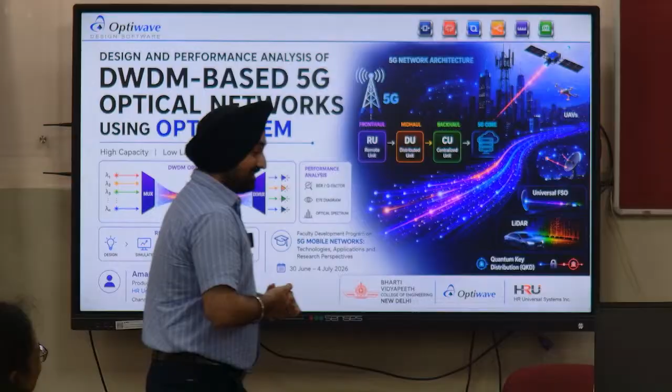So from the name optical, I would like to interact with you. What is optical communication? I always start with this question. Partially it is fine. What is optical communication? Yes, correct. As a layman, anything you want to transfer or communicate with the speed of light is optical communication. If you modulate the data and bind that as a carrier on a... exactly, basically when you transmit something and the carrier is laser, so that is optical until it is received.

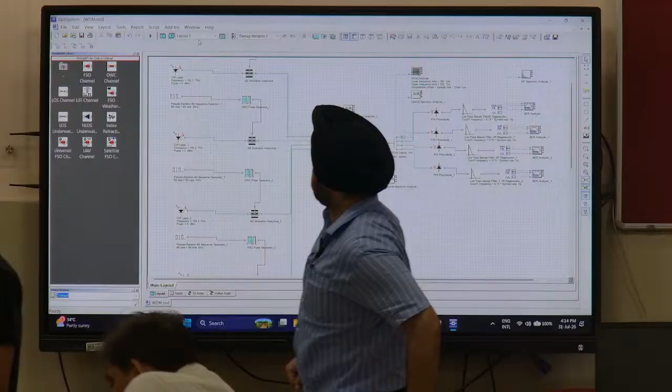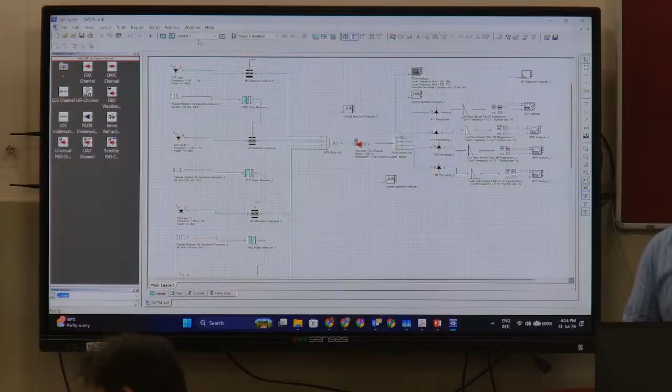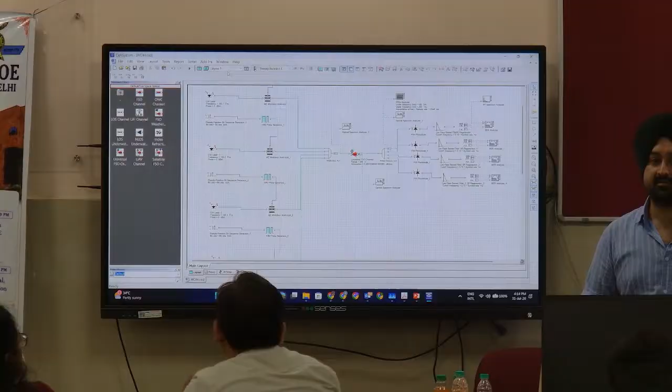Okay, so as per the topic, wavelength division multiplexing, or DWDM, whatever you want to call it enhanced. So I have performed a WDM application here with three scenarios: utilizing free space optics channel, utilizing optical fiber, also utilizing ground to UAV, UAV to UAV, and UAV to ground.

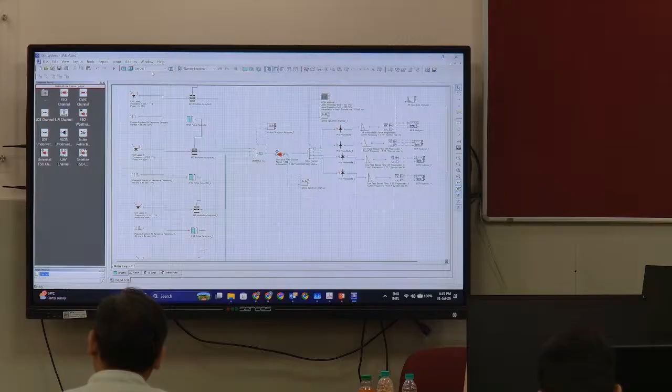Recently there are no such highlights regarding WDM application with respect to UAV methodology, but in case you are interested, you can explore this and you can publish as many papers as you want. Very simple, fundamental.

So here, let me explain you, for those who are new to this concept: we have taken four transmitters. These are optical transmitters 1, 2, 3, and 4, the four optical transmitters. Now, how have we compiled this? Let us see.

This is a carrier CW laser. You can either choose it as a frequency in terahertz, or you can choose it as a wavelength in nm, depends upon you, or even hertz also. So whatever units you want, you can use. If it is in nm, let us say 193.1 terahertz is equal to 1552.52 nm, that is approximate.

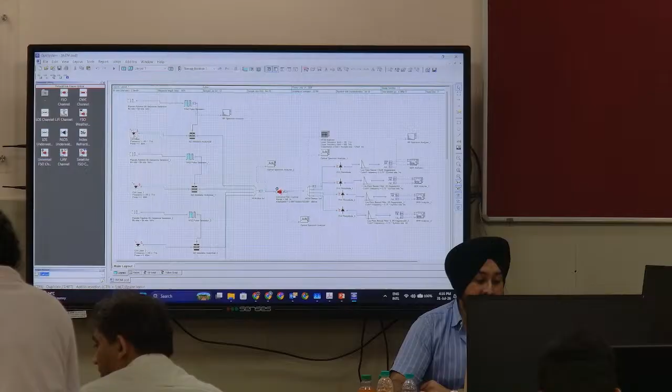So this is a carrier, this is a modulator, and this is the data we are binding, or you can say we are modulating it with the carrier. So this data is the pseudo random bit sequence generator, meaning it will randomly generate zeros and ones. Or in case you have your own bit pattern in the form of zeros and ones, you can choose a user defined bit sequence generator to define your own bit pattern.

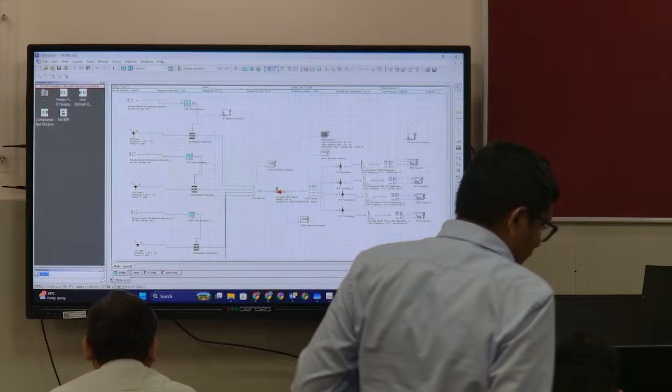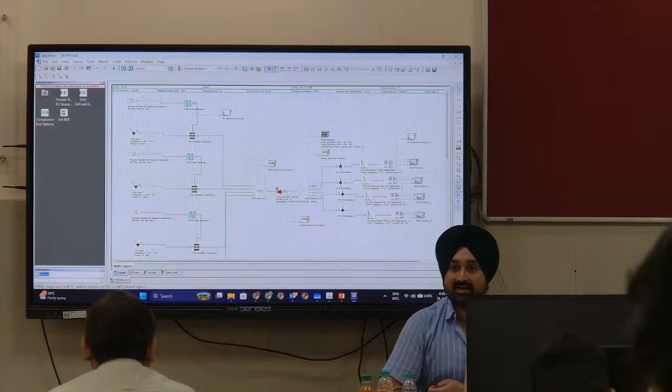So this is in the form of bits, that is zeros and ones, binary signal. You can assume that in case you have audio, video, images, whatever data you have, you can encrypt it in the form of zeros and ones, that is binary. Then the binary data is fed into an electrical generator, which gets the binary digits from this generator and converts it to an electrical signal. If you double click on the output port, you can see this is the electrical signal.

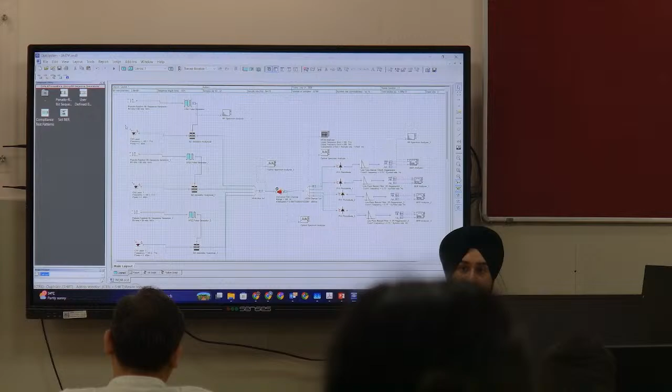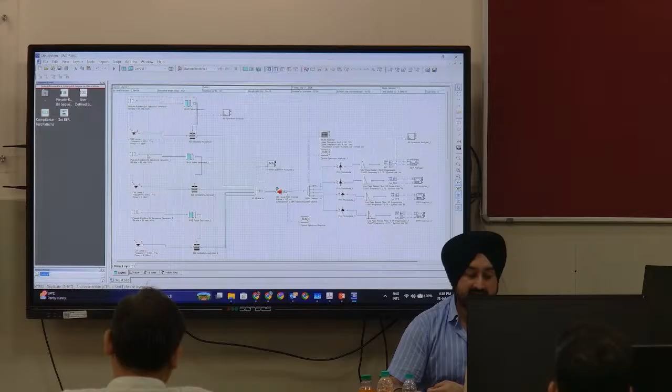This electrical signal is further fed into the Mach-Zehnder modulator. Here the Mach-Zehnder modulator takes input from this NRZ pulse generator in electrical form, and another input through the carrier, that is optical signal. So both arms are fed with the respective signals, and in turn we are ready with our final output at the Mach-Zehnder modulator, that is the optical signal. So in this way, these are the 4 transmitters, but here the variation is as per the principle of WDM, wavelength division multiplexing—it means we are varying the wavelength or frequency.

So at the first transmitter we are utilizing 193.1 terahertz. In the second one we are using 193.2, third 193.3, and fourth 193.4 terahertz.

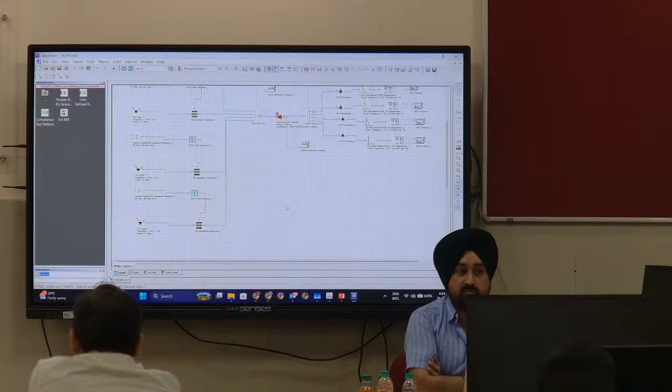So in respect to your application, you can design multiple channels: 2, 4, 8, 16, 32, 64, and so on. It depends upon the application you want. Accordingly, you can create the number of channels.

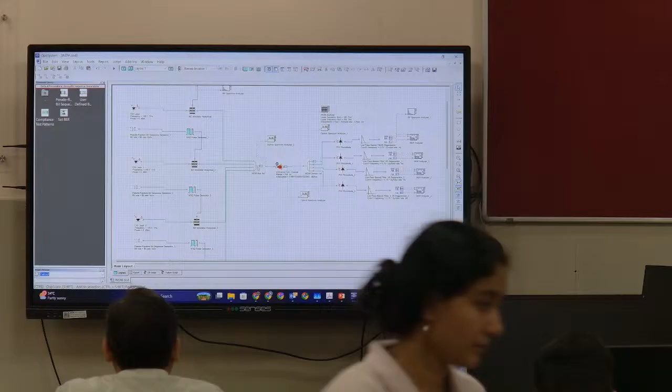So now, after getting the optical signal from all the transmitters with varied frequency or wavelength, we are muxing it using a WDM muxer. This is 4x1, and you need to mention the channel frequency with respect to the signal you are receiving. For the first one it is 193.1, and up to the fourth it is 193.4.

Then we are using a medium, that is the universal FSO channel. Here the universal FSO channel range I am using is 200 meters. You can optimize this, you can increase the range depending upon the actual result you are getting.

I am utilizing the FSO weather parameters for clear, haze, and fog environments. Depending upon the visibility, you can change this as per your application.

So here it is open-ended, a clear environment with 50 kilometers of visibility. And if you feel it is foggy, you can mention 50 meters, 100 meters, whatever scenario you want to create. And if you want rain or snow, you can choose precipitation.

For precipitation, you need to mention the precipitation rate depending upon the rain, cloud, or snow. And if it is clouds, you need to choose the type of cloud. We have a list of clouds here, and depending upon the height or altitude from the ground, you can choose the clouds for the environment.

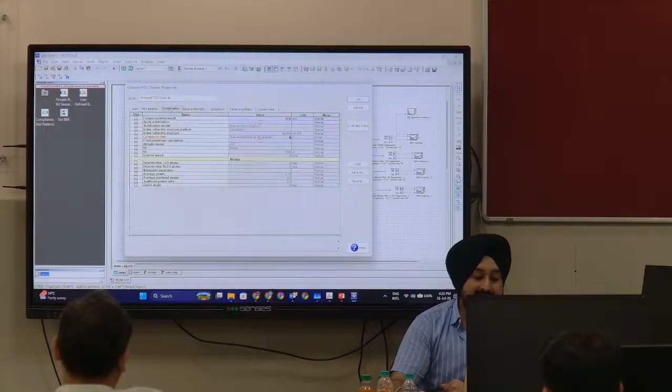Right now I am choosing a clear environment with a visibility of 50 kilometers and a radius of 1000 nm. I am not choosing any scintillation here because I am not rigorously doing research here. This is just for the sample.

So this is the universal FSO channel, and after passing it through this, we are again demultiplexing it using a WDM demuxer. This will help you split your frequencies into separate channels, and after splitting you are receiving it on a respective pin photodiode, avalanche photodiode, or any receiver you have.

And after receiving it on a pin photodiode, we will be filtering it using a low pass Bessel filter. At last we are doing analysis of the quality factor, your eye diagram height or eye opening, and we are also checking for OSNR and SNR, meaning signal to noise ratio and optical signal to noise ratio.

In optical communication or these kinds of applications, when you are analyzing something, a few factors or comparisons will help you enhance your publication. For example, BER, quality factor, amplitude histogram, OSNR, SNR, and power factors, meaning what you are feeding as input, and at the end what power you are getting at the output.

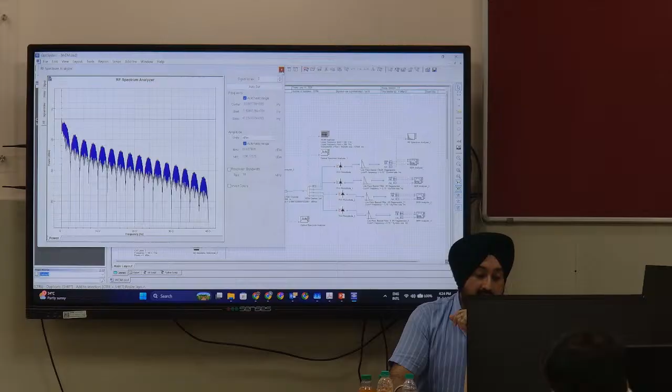This is basically generated by your NRZ generator after getting the random bits. The bits can be anything; you can feed your own bits. For example, if you are working with another simulator and your output is in the form of bits, you can choose those bits and feed them here. That can also be utilized in this case.

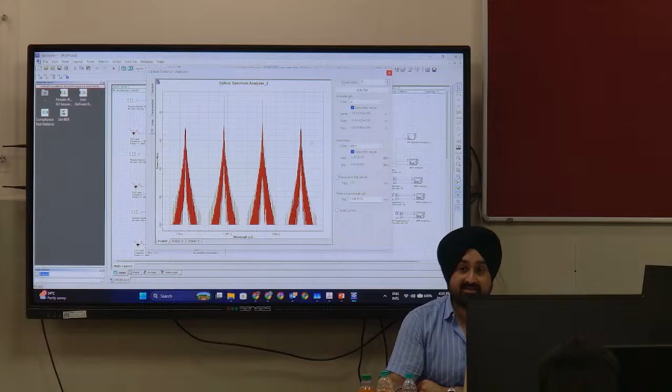And the spectrum analyzer, when you bind everything, when you mux everything, at the optical spectrum analyzer you are getting 4 various wavelengths or frequencies, you can say. So this is the output of the optical spectrum analyzer. In case you have the same in your lab, you can do some R&D and see how the visual effects appear with your OSA.

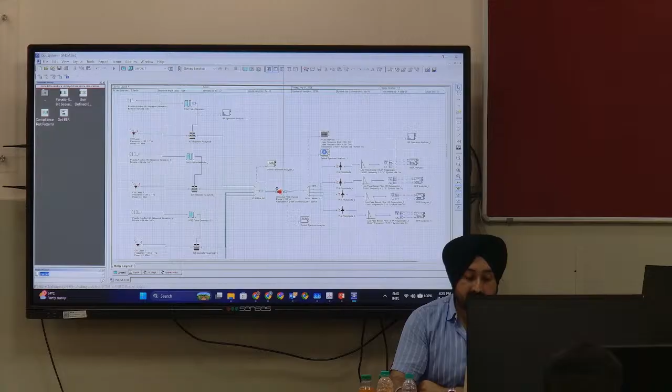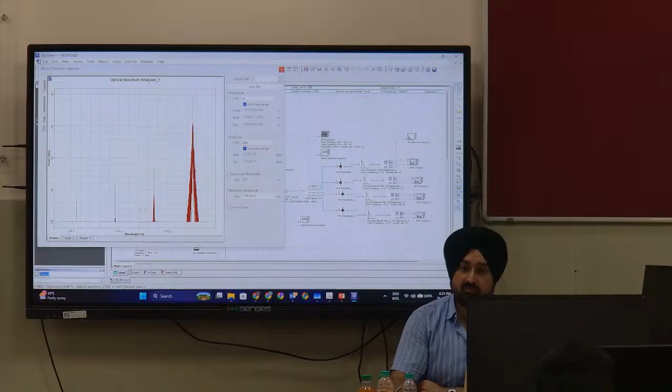And at a single channel, I am looking at another spectrum. So this is the main channel frequency we are getting here. Also, we are getting some harmonics, leftover harmonics, in relation to other channels.

So if I look into the analysis, here I have 73 Q factor, minimum bit error rate 0, eye height threshold decision. We have these results at one channel, similarly for another channel, then third channel, and fourth channel.

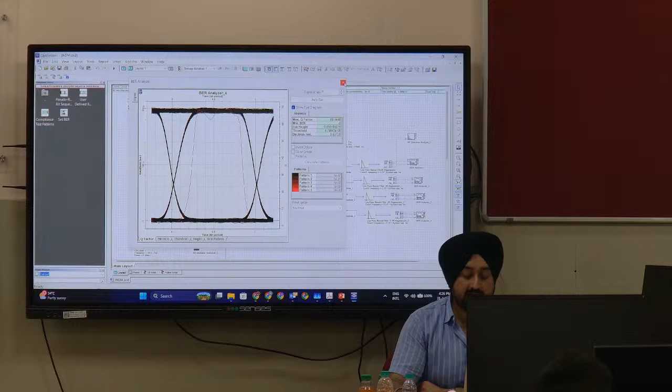So we have successfully compiled a WDM based concept using free space optics channel, where we are utilizing a 4 channel system, using 4 channels for our various applications, binding it together, transmitting it through a free space medium, receiving it at a ground, and again distributing it to our subscribers.

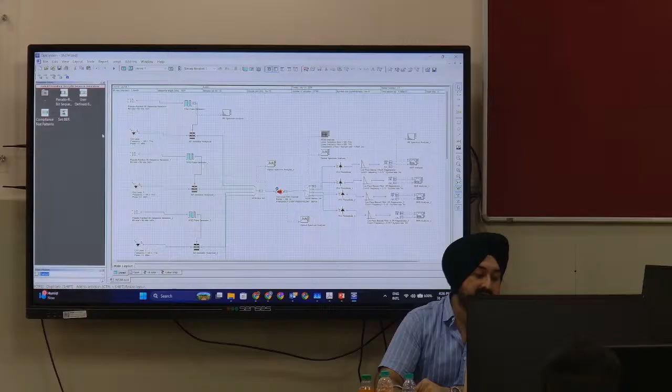Yes, I am using NRZ technique. Yes, we can change, we can choose RZ also, but as per actual research, RZ is better than NRZ. Exactly, right.

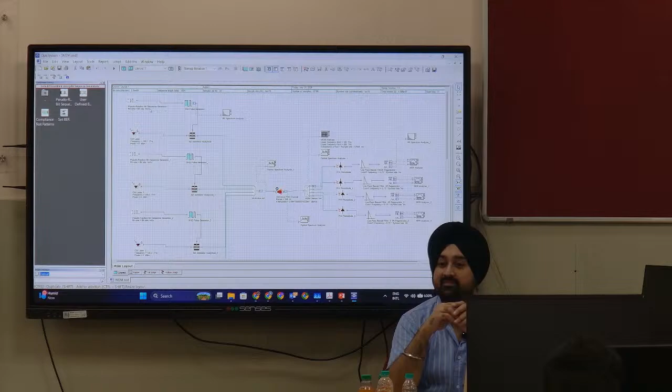So you can compare these methodologies. You can design using RZ, NRZ, and other application factors as well, and then at the last, you can compare. This can also be a research paper.

Okay, so this was utilizing FSO. What if I use optical fiber? Generic single mode fiber, SMF, and in India we are utilizing SMF28.

That is a patent of Corning Inc, USA. Corning Inc is a company in USA who manufactures optical fibers, and of course they are the main developers of Gorilla Glass. So the Gorilla Glass is in our screen of the phones or LEDs. That is basically patented, manufactured, or invented by Corning USA, and SMF28, which is being copied in India for fabricating optical fibers. Like they have taken the reference from SMF28 Corning.

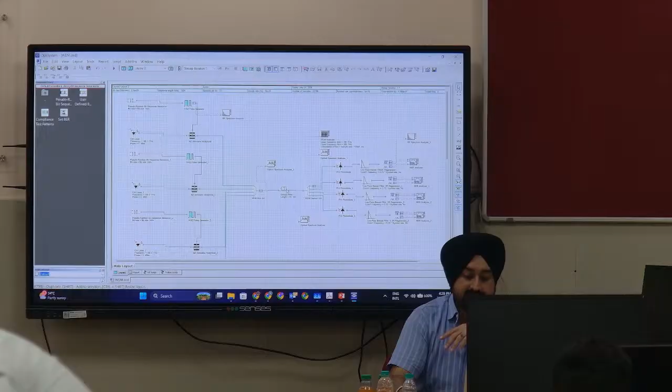So this optical fiber is SMF28, and you can change the properties of this optical fiber as per your application. So here it is generic 1550 nm, 50 kilometers of length. You can change the length of the fiber, and the attenuation type, like either it is constant or it depends upon your own logic.

In case you have your own file, you can customize it. Attenuation you can change. Generic way it is 0.2 dB per kilometer, and if you feel you have your own fiber from another company and on their data sheet it is mentioned 0.4 or 0.1, you can mention it here as per the data sheet of the actual fiber manufacturer.

Then dispersion coefficient like GVD and all, group velocity dispersion, third order dispersion, beta 2, beta 3. So these are all the parameters related to fiber development. Depending upon your requirement, you can change. Similarly, all other properties can be changed, but here I am taking it by default.

So after simulating, utilizing this 50 kilometers of optical fiber, again, here now you see the BER, it is average. So you can fine tune the BER, and quality factor is good because as per IEEE it should be 6 or more than that, right?

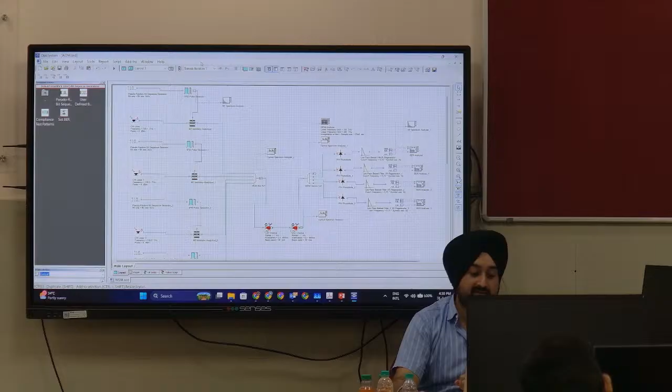And similarly, what if I choose UAV? I don't think there are many publications in relation to this WDM utilizing UAV. So here what I have tried to do is, after muxing, I have processed my data from ground to UAV, means from ground to UAV. So this is my UAV.

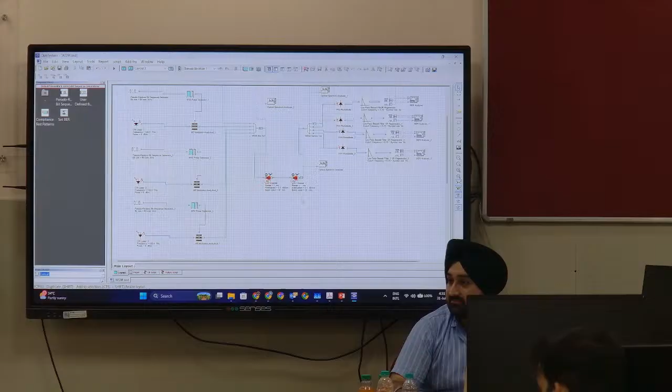Ground to UAV, and this range is 1 kilometer. This is what I'm trying to do here. You can do this, you can do this. You can transmit this optical signal from one UAV to another UAV, to multiple UAVs, and then to ground.

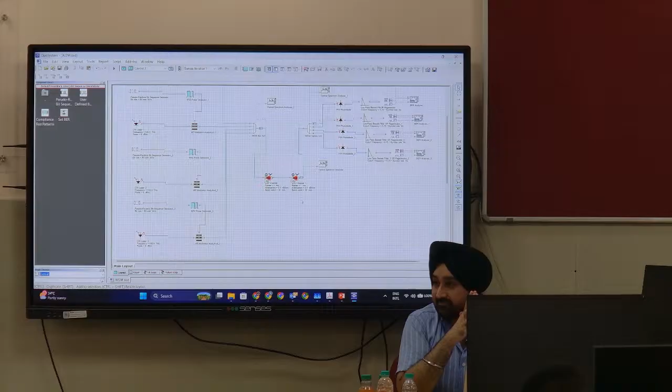Even now, there is a free space link for that one state and another. So as a concept, yeah, it is possible. Let me check, I don't think so.

Recently, we have played with the beam waist, transmitter height, and altitude discretization steps, then scintillation. In case you have a working model, or if you want to work on that model, we can collaborate. We will add this with your name.

We will do that. So here you can change the dynamics of UAV, like transmitter jitter or receiver jitter, its angular tilt, then beam wander, it all depends upon the beam. For a proper PAT system, you should be very focused upon the beams, so you can play around with the beam profiling of the communication.

I request you to explore the evaluation version of the latest version so that you can read the datasheet of this UAV. This was implemented through NRC, the National Research Council of Canada, a government entity that funded this project. After completion, we made a model of this UAV and introduced it in OptiSystem.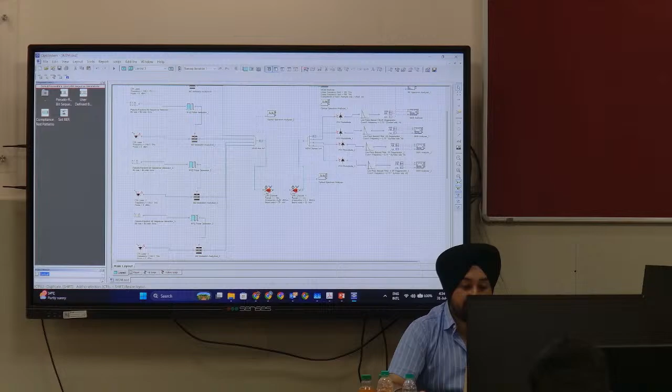Maximum Q factor 226, BER 0, eye height threshold, and for the second channel it is approximately the same. For the third channel again a clear eye, and for this one also a clear eye. So this system is successfully deployed, with a range from ground to UAV of 1 kilometer, then another 1 kilometer.

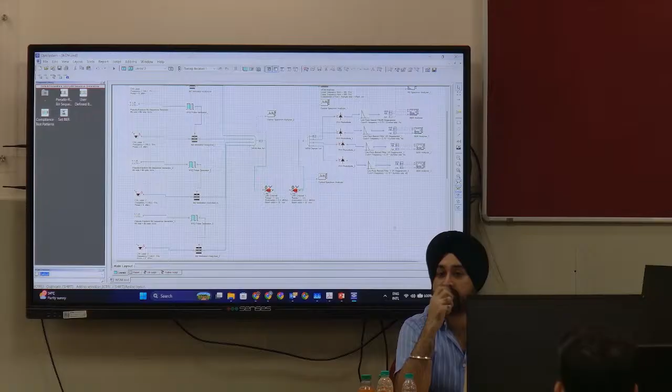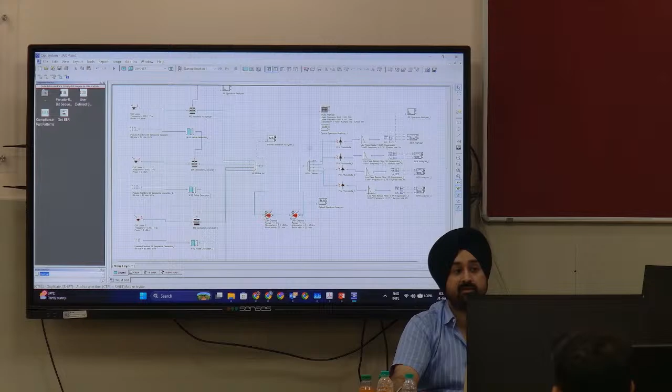For 2 kilometers of flying UAVs, we have successfully implemented WDM application. You can also work on this. WDM using FSO has a lot of papers, but WDM using UAV you can search for. You can even multiply this, from one UAV to multiple UAVs, or from ground station to multiple UAVs, like a tree communication for the WDM concept.

Any question? This is a kind of hybrid concept. FSO is fine, but what if your free space optics channel, the UAV, whatever it is like drone or balloon, is not stationary and is flying? You have to take care of beam profile to manage proper pointing, acquisition and tracking, and all parameters will be taken into account so that it helps analyze the eye opening at the receiver and the power taken for that.

Definitely for longer ranges you have to maximize the power. Here it is 1 milliwatt, 0 dBm is equal to 1 milliwatt. So you can maximize the power in case you want to increase the range, but there will be more noise, and you have to suppress and filter that.

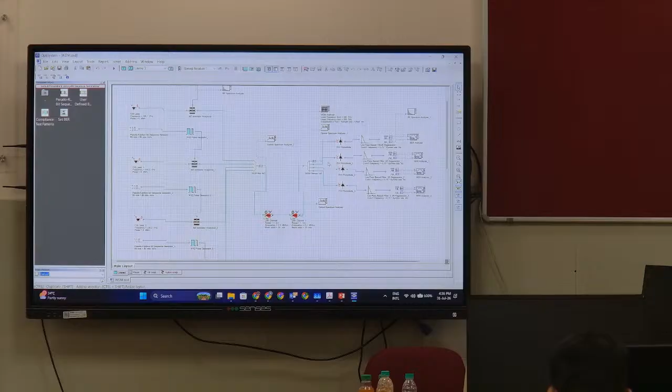Once you start doing some project or writing a paper, you will find a lot of equations. In case you want to publish that, you can add a lot of things to this. Any question?

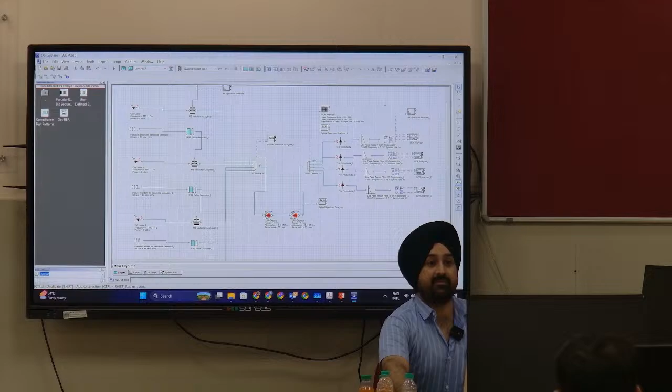For the global parameters, it depends upon application to application. For example, if I double click here and set the iteration to 20, your runtime will go for 20 iterations, and at the end you will have a signal index profiling, which is what I am explaining right now. If I simulate this, it is still working because the iterations are 20. Done.

Accordingly, at some point you will get a better result. This is the reason we choose signal index. Good question. Anybody?

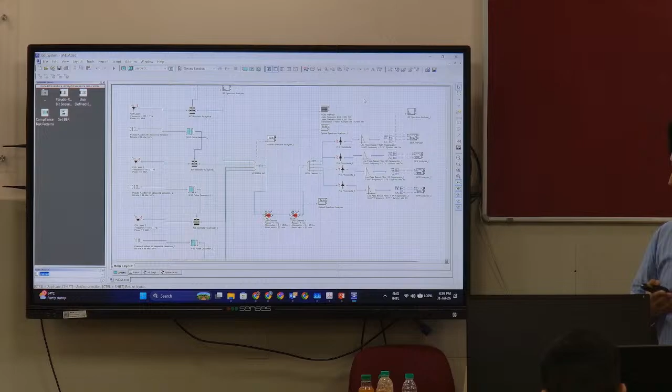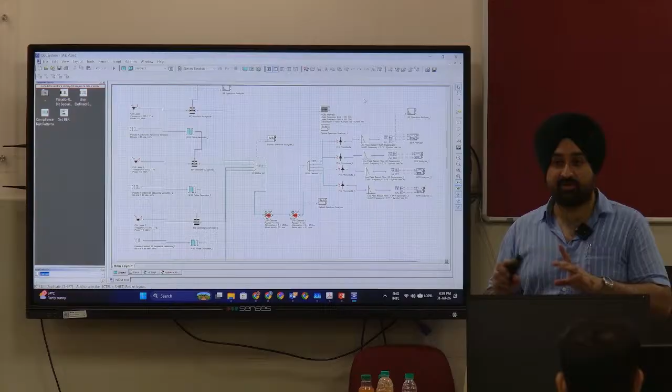Now the final conclusion for this application: you can use wavelength division multiplexing or dense wavelength division multiplexing or any kind of application utilizing this concept, and choose your own channel depending on how complex you want to make it or if you want to compare it, and in that case you would like to publish it. So I request you to evaluate it and do your publications. Now should I move again to the PPT, or should I stop? I have a lot of data to share, but anyway, thank you so much.